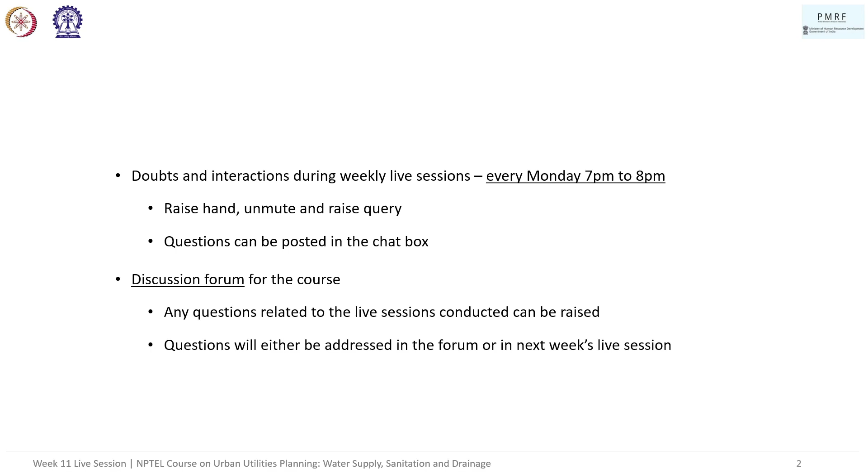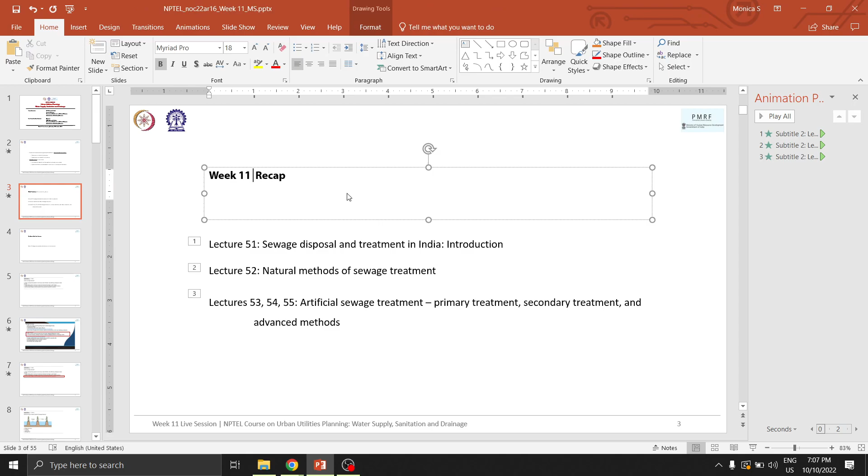So, week 11 recap. We basically had lecture 51 focusing on sewage disposal and treatment in India. There was an introduction given with a few case studies. Lecture 52 had natural methods of sewage treatment and what are the consequences when it is allowed, etc. The next three lectures focused on artificial sewage treatment, which involved primary treatment, secondary treatment, and some advanced methods were covered.

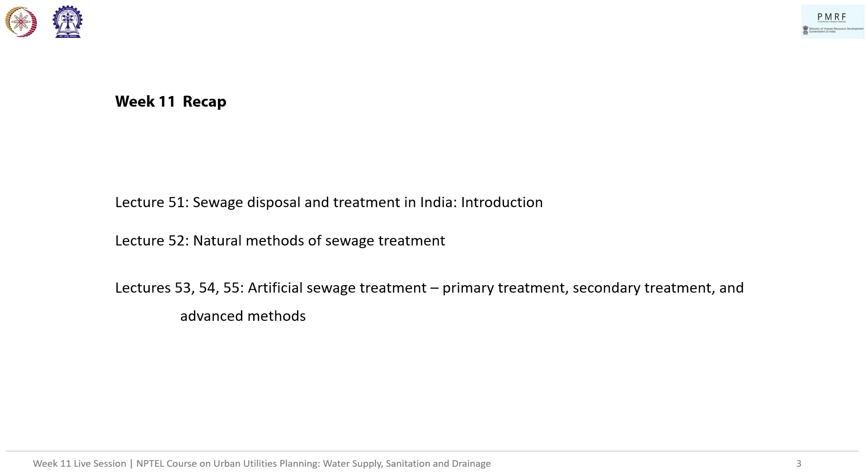Right. In this live session, we'll basically be looking at a few questions corresponding to week 11's assignment from the previous run of the course. So please note that there are quite a few minor errors throughout the session.

Also, since Ms. Supriya has queries in the current session, let's start with that. Right, so this was the originally planned one.

Ms. Supriya, you said that you have a query in question number 12, right? Yes. What is biological treatment of sewage, and what it is, with options also. I'll explain it, don't tell the answer. We'll come back to it because I told you I might have one question which is close to this, so we'll come back to this at that question.

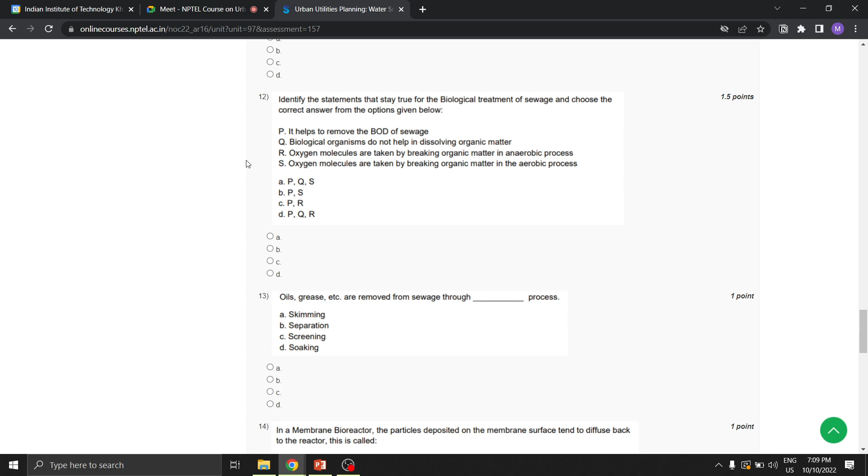By dilution is just one option, right? Like how you can address sewage. But if certain things happen, you're not allowed to go for treatment by dilution, right? You need to meet certain conditions, only then can you allow treatment by dilution. I'll give you one major option that doesn't meet the requirement.

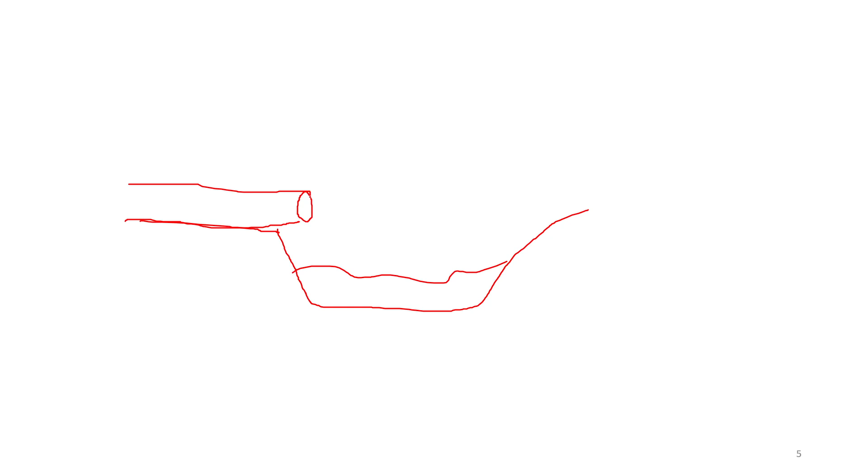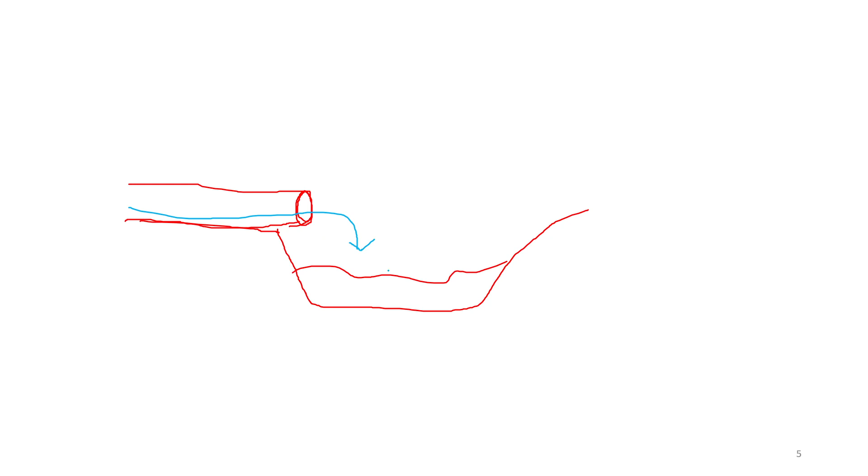For example, take D, backflow to sewer. So if there is backflow to sewer - if you remember, say there is a water body, right? And you have a sewer from the city, sort of draining sewage in. However, if the water level sometimes rises and there is going to be backflow into the sewer, then you actually cannot have dilution, right? Treatment by dilution.

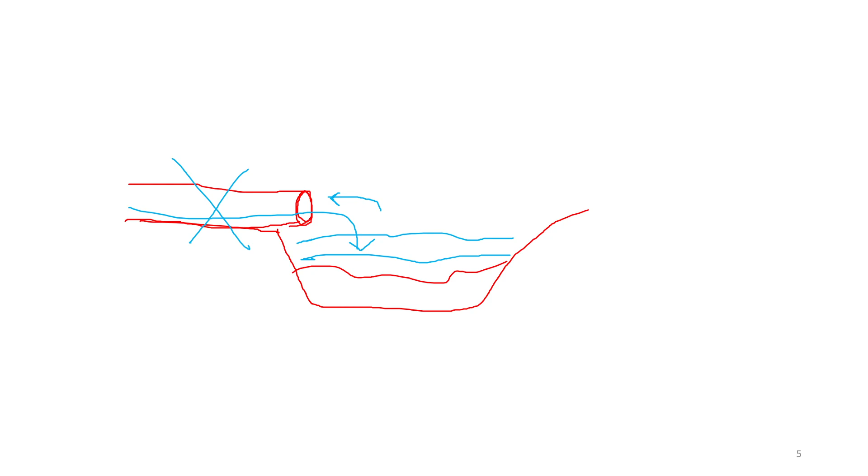Treatment by dilution is basically when you have a large water body and you just mix sewage into the water body, and it's so vast, or the movement of water is so high, that it will not affect the concentration of sewage in it, will not affect consumption, or will be sort of taken care of, right? Does that answer your issue, Supriya?

Yeah, backflow of sewer, that doesn't work, right? So what do you think the answer should be? What is the basic condition, of the four answers given, that will allow treatment by dilution?

Okay, unharmful to aquatic life. Yeah, it basically shouldn't be harmful to aquatic life. If you notice, if there is backflow, if there is sludge bank formation, you cannot allow it. Insufficient depth, you cannot allow it. And if it is unharmful to aquatic life, you can allow treatment by dilution. So that's how you are supposed to look at the answer. And backflow to sewer, again as I explained, you cannot allow it. Is that clear? Okay, so unharmful to aquatic life is the correct answer.

Yes, okay. Sludge bank formation, can you explain? So sludge bank formation is when there is too much sedimentation of sludge - again, it's when there is incoming sewage into the water body.

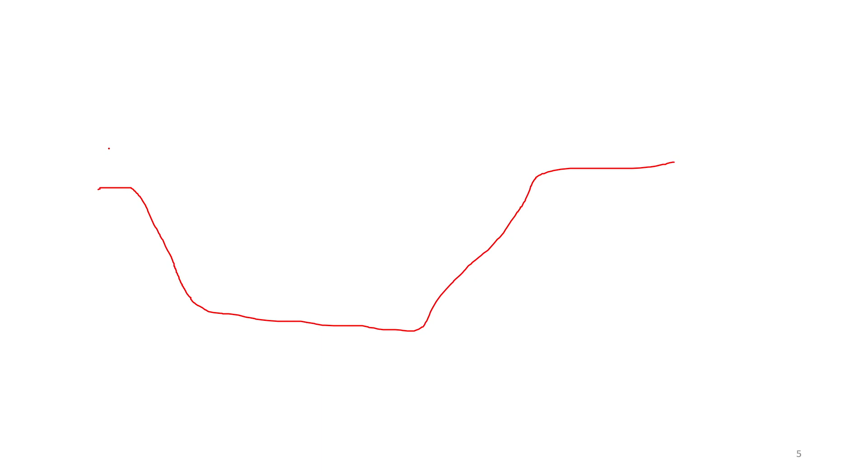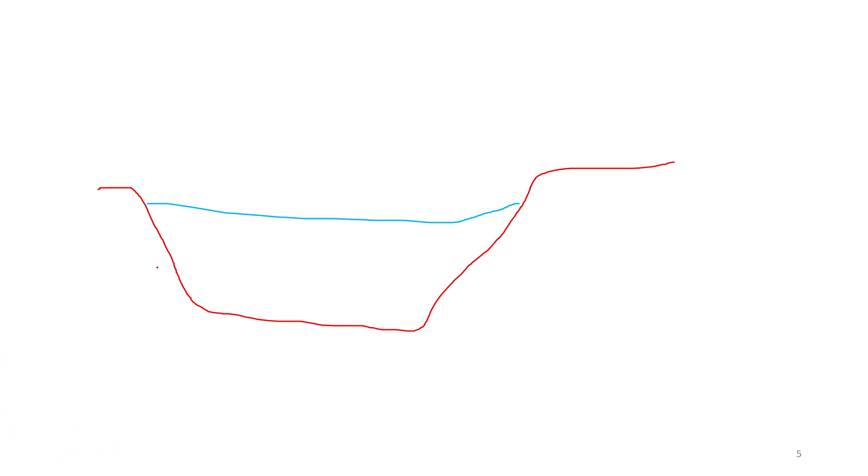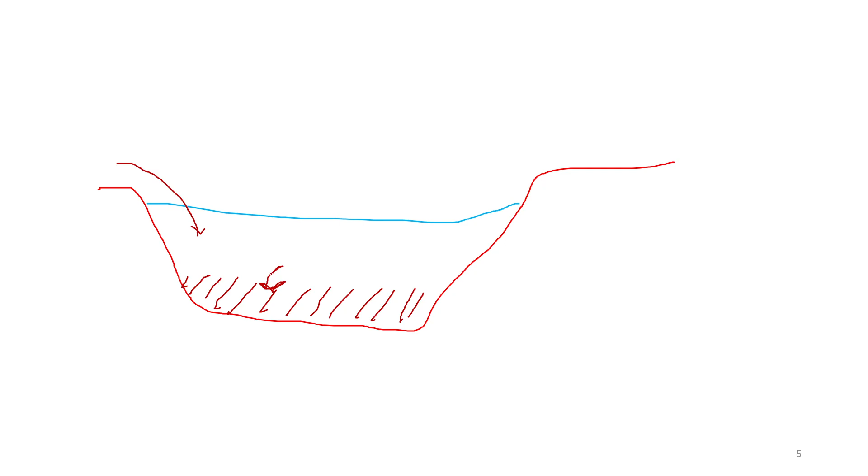So say this is the water body, and there is incoming sewage into it. If the water flow is very low, if the movement of water is very low, it will start forming sludge. Because of this formation, two things happen: one, the capacity of the water body reduces, but it can also lead to anaerobic processes, which means the water body will start stinking very soon. So that is why you cannot allow it.

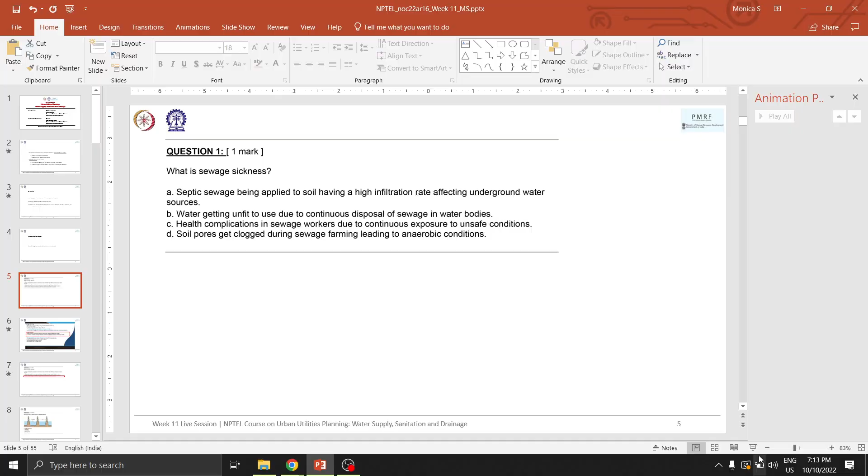So let's go to the questions from the previous assignment.

Question number one: what is sewage sickness? A. It is septic sewage being applied to soil having a high infiltration rate, affecting underground water sources. B. Water getting unfit to use due to continuous disposal of sewage in water bodies. C. Health complications in sewage workers due to continuous exposure to unsafe conditions. D. Soil pores get clogged during sewage farming, leading to anaerobic conditions.

Any answers? It's D. Soil pores get clogged during sewage farming, leading to anaerobic conditions. Anybody else?

That's the right answer. Most of these questions are going to be theoretical, so let's continue.

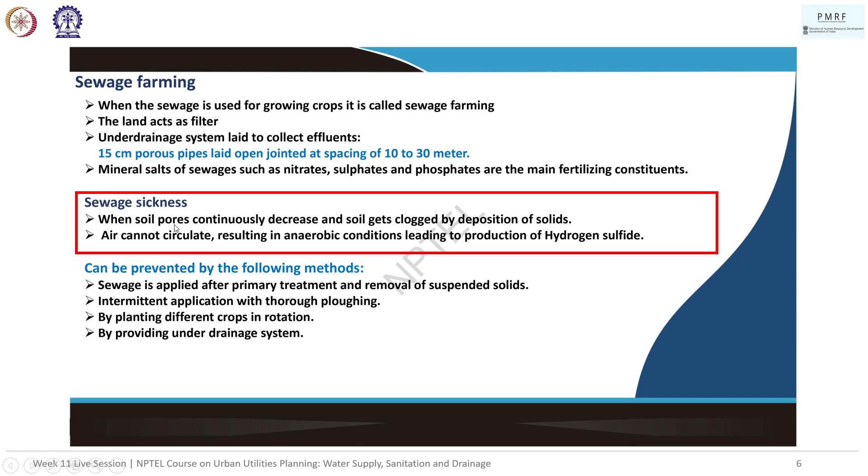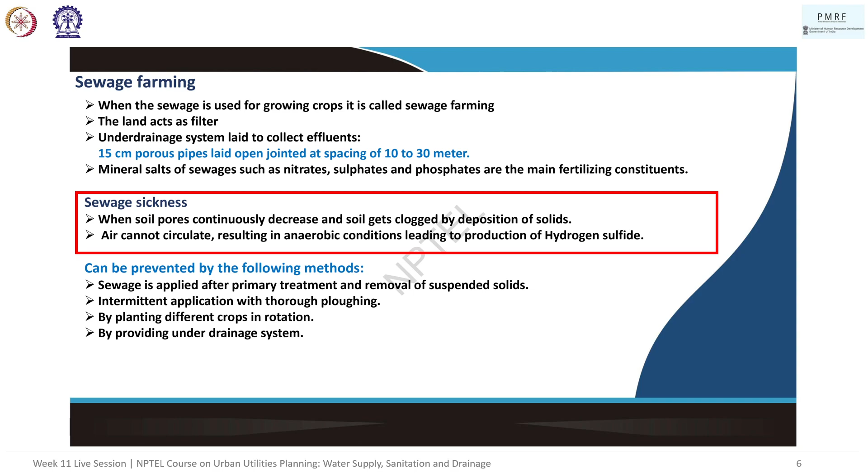So the answer is: when soil pores are continuously decreased and it gets clogged by the deposition of solids, air will stop circulating and anaerobic conditions prevail, and there will be a production of hydrogen sulfide. So the answer is D.

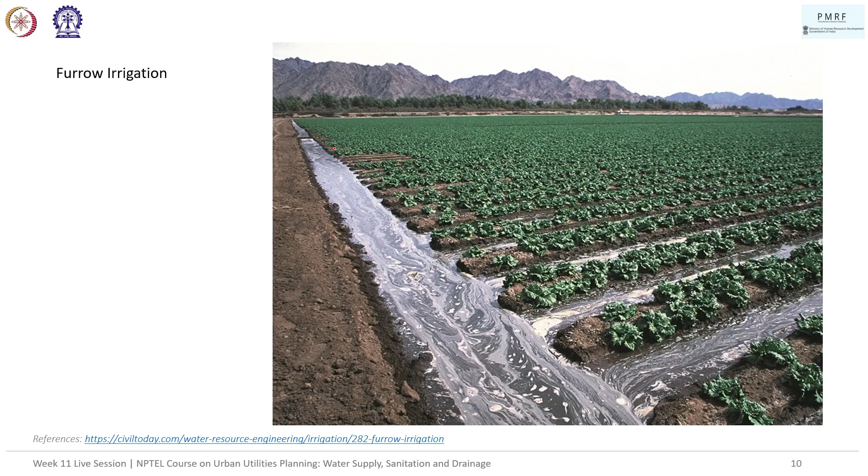If you notice from the slides, ridge and furrow is given. You can see the image right here. It is basically land plowed deep into 30 centimeter furrows, leveled into plots and subplots. They are enclosed by dikes forming ridges and furrows in the subplot. So essentially it looks like this. Please keep in mind that ridge and furrow irrigation is not a term specific to sewage treatment—it's actually a very common irrigation term. However, we can use this form of irrigation to do sewage farming.

So that's ridge and furrow. Flooding is basically when the crop is located in water, and you flood the entire crop. This is permissible in certain crops—for example, rice cultivation basically starts off like that.

Then lagooning is not actually a natural method of sewage treatment—it's a part of the sewage treatment process. Essentially you construct a huge reservoir, but it's an indirect method. Water is detained for a period and then taken out, and the sludge that builds up is used in farming. So that's how lagooning comes into the picture.

And managed turf is actually just another term for spray irrigation. Anybody familiar with sports will know the turf—it's managed and very properly maintained. The growth is not allowed to go beyond a certain level, so the height of the grass is very strictly maintained. That's a turf.

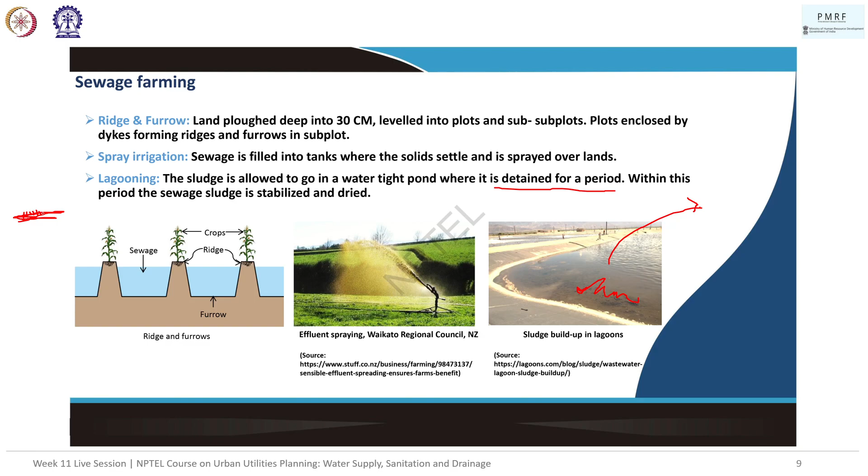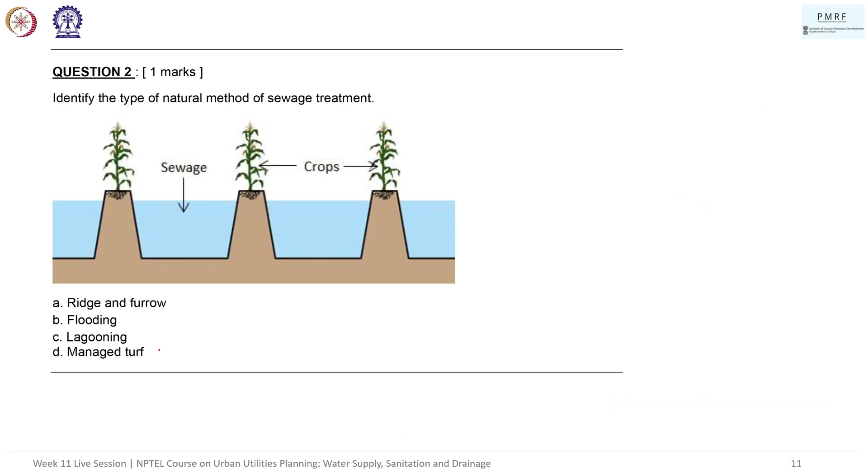So managed turf is not really directly applicable, but even in this context we can use sewage treatment for managed turf, though the managing part becomes difficult. Only the underground methods—if you remember from the slides, where you have underground pipes carrying sewage—can be used for managed turf. But correctly, the answer is A.

Moving on to the next question. The processes involved in the aerobic type of biological sewage treatment are: A. Hydrolysis, bioreduction, biosynthesis. B. Glycolysis, hydrolysis, bioreduction. C. Hydrolysis, biooxidation and biosynthesis. D. Glycolysis, hydrolysis and biooxidation.

Any responses? So right now we are particularly talking about the aerobic type of biological sewage treatment. In essence, there can be two types of biological sewage treatment: one is aerobic metabolism and the other is anaerobic metabolism. However, in the slide you can see three processes.

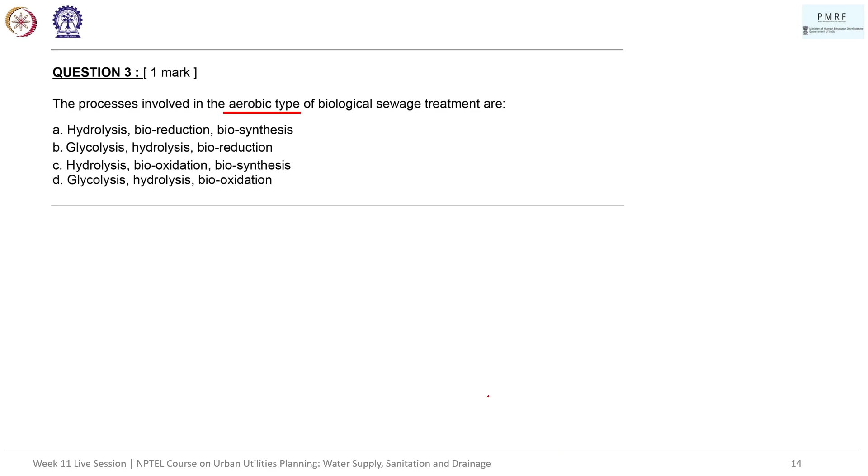So the answer is actually C: hydrolysis, biooxidation, and biosynthesis. These are the processes involved in the aerobic type of biological sewage treatment. Any queries regarding this? No, okay.

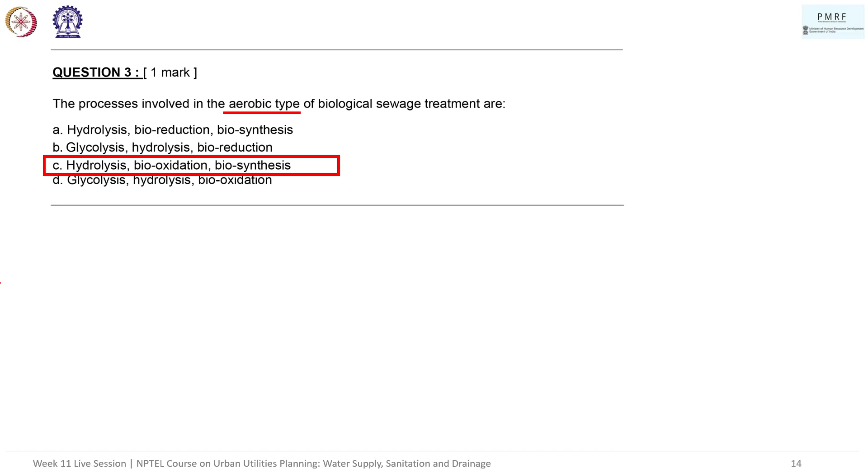So just take note of this correction, right? Moving on to the next question.

Which statements is or are incorrect about the biological treatment process? A. Biological sewage treatment involves aerobic or anaerobic microorganisms to decompose the organic and inorganic particles of sewage. B. Biological sewage treatment involves activated sludge process, sequencing batch reactor, and membrane bioreactor. C. Nitrogenous compounds are released during anaerobic process mostly. D. Bioreduction of soluble organic matter results in the release of hydrogen sulfide, methane, water, ammonia, and energy. And E. Methane production is achieved by aerobic process. Any responses?

Okay, let's look at each one of the statements. First, biological sewage treatment involves aerobic or anaerobic microorganisms. That part is correct because we have two mechanisms, aerobic and anaerobic. Some organisms might overlap, but fundamentally there's a set involved in aerobic processes and others that are anaerobic microorganisms. These are fine to decompose the organic and inorganic particles of sewage. So this is where the issue comes in. Both of these are actually only going to act on the organic particles of sewage. The inorganic particles cannot be processed by microorganisms. So biological organisms are allowed to consume the organic matter, but they cannot deal with inorganic particles of sewage, which means A is one of the incorrect answers. B, we'll consider later. Let's move on to C.

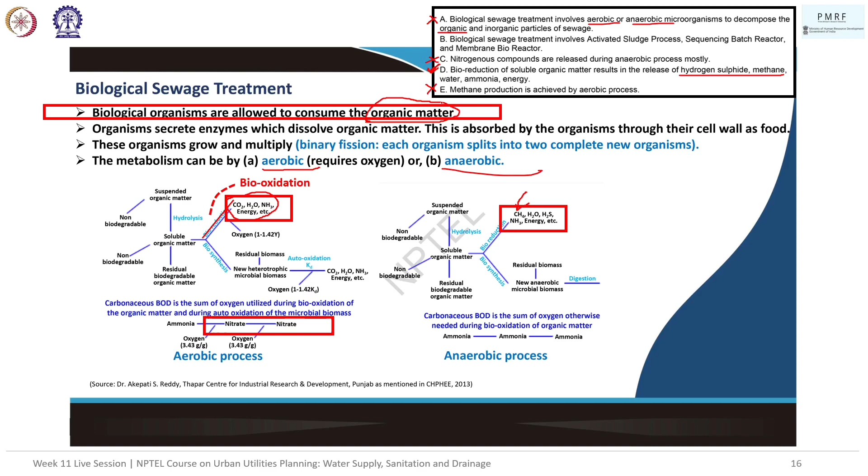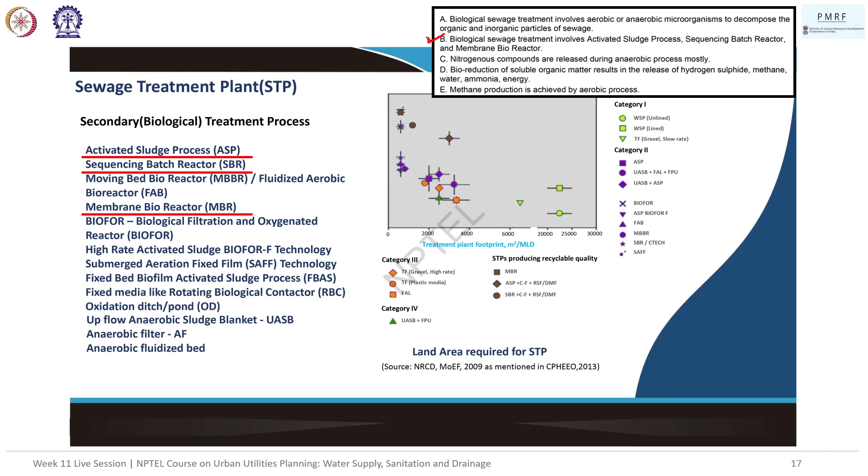Let's look at B. Biological sewage treatment involves activated sludge process - yes, if you look at it from the slides. Sequencing batch reactor, yes, it's part of the list, and membrane bioreactor. So this statement is also correct about biological sewage treatment. So the answer is actually A, C, and E. In A, inorganic particles is the problem. In C, it's actually produced mostly during aerobic processes. And E, methane production is achieved actually by anaerobic process. Any queries? No. All right, so these are particular things that you basically need to notice while reading through the statement. I mean, something as big as this statement, I would have also probably missed the organic and inorganic part. I'll be concentrating on the aerobic and anaerobic microorganisms part, but please be mindful of this.

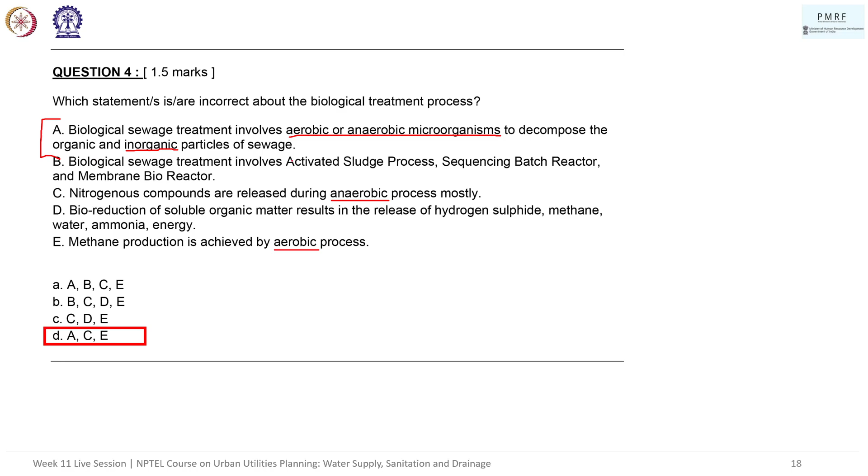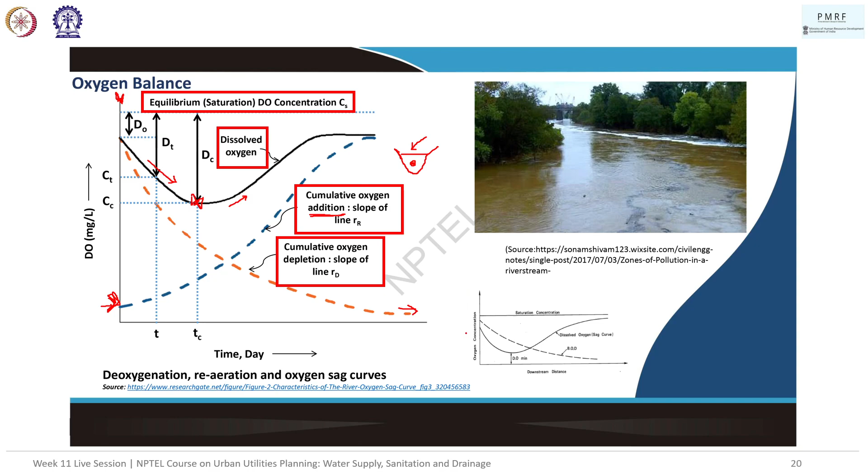BOD keeps decreasing because organic matter is either settling down or being processed by organisms. So the answer is actually D. A and B were right, but C is the reoxygenation curve. So over time, oxygen will keep increasing and BOD will keep decreasing.

Any queries? No, please go ahead. Okay, I hope that's clear and it will help you remember the curves as well. Right? Yeah, so next question.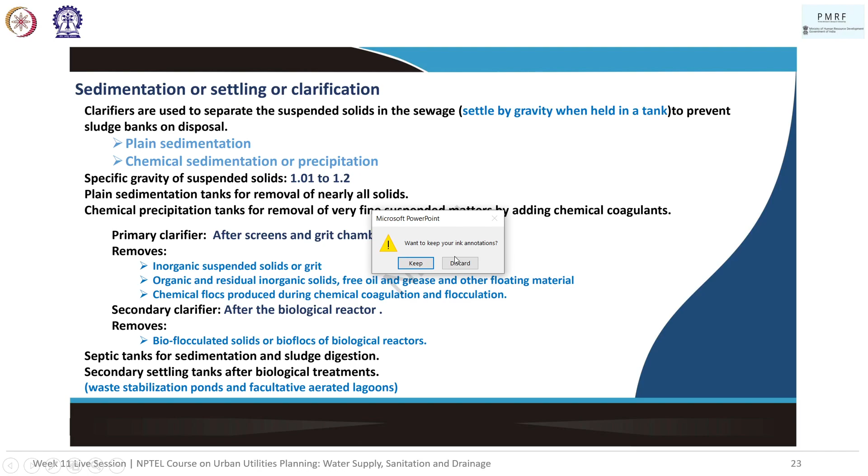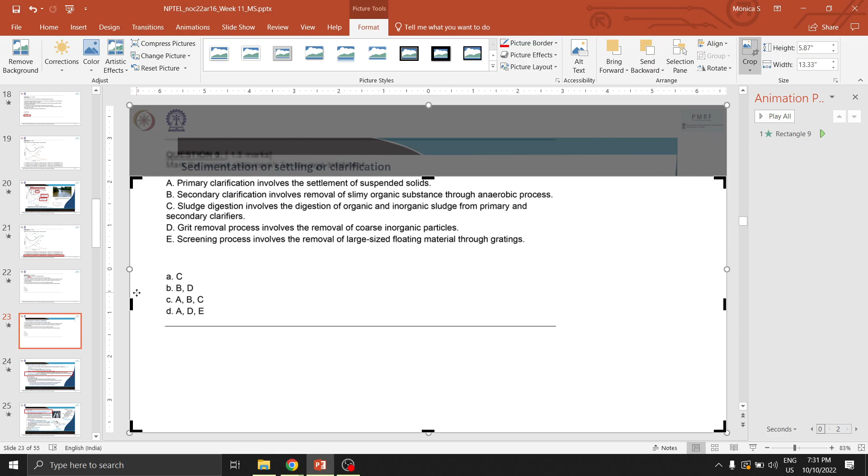Let's go ahead and look at the statements, right? So the first statement is about... okay, I didn't include it, let me just include the statements here for ready reference, otherwise it's difficult.

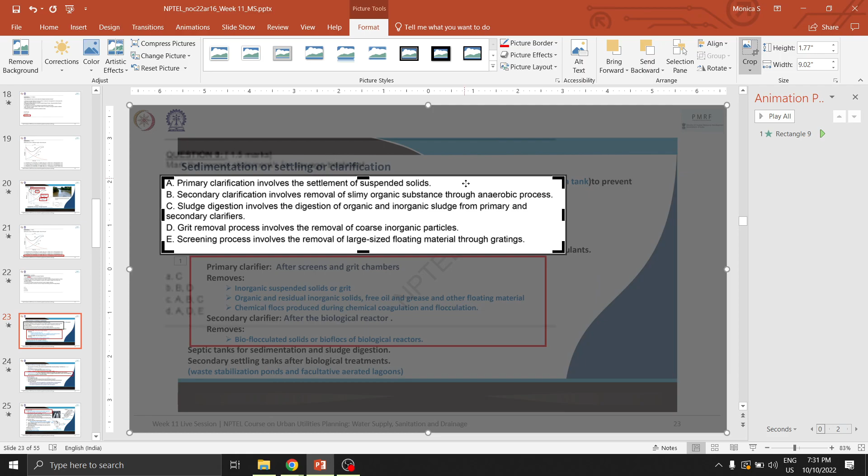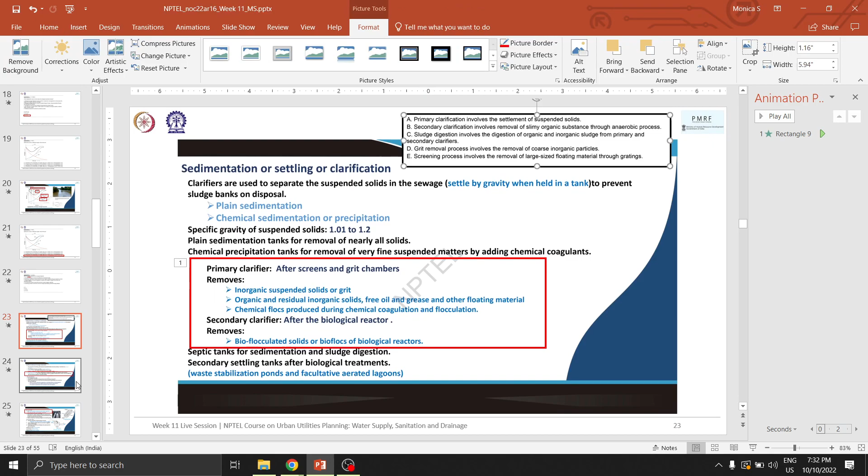So, first statement: regarding primary clarification, it involves the settlement of suspended solids. Yes, it does involve the settlement of suspended solids. It actually happens right after the screens and grit chambers phase.

Then the secondary clarification statement says it involves removal of slimy organic substances through an anaerobic process. The issue with this is, yes, secondary clarification does involve settlement and separation of settled slime, that part is fine. However, it's after aeration, it's not an anaerobic process. So this sentence is actually wrong.

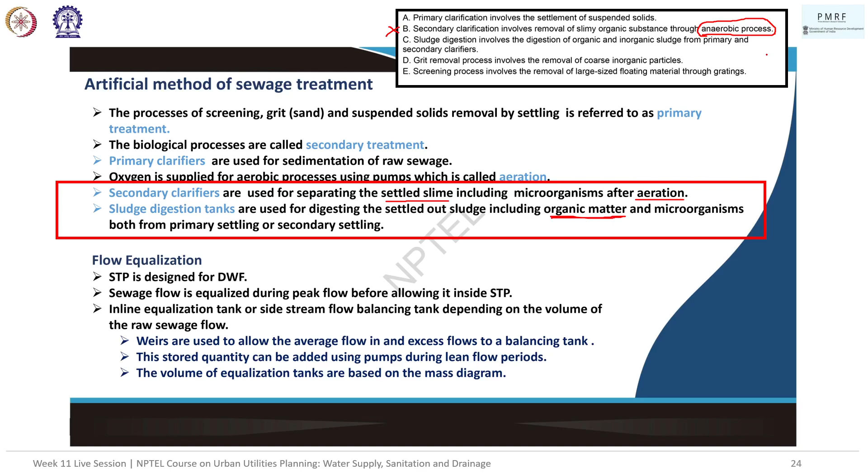The third statement, about sludge digestion: sludge digestion involves the digestion of organic and inorganic sludge from primary and secondary clarifiers. Again, sludge digestion actually involves only organic matter. So yes, it does involve sludge from both primary and secondary clarifiers, that part is fine, but the inorganic sludge part is wrong. So this statement is incorrect.

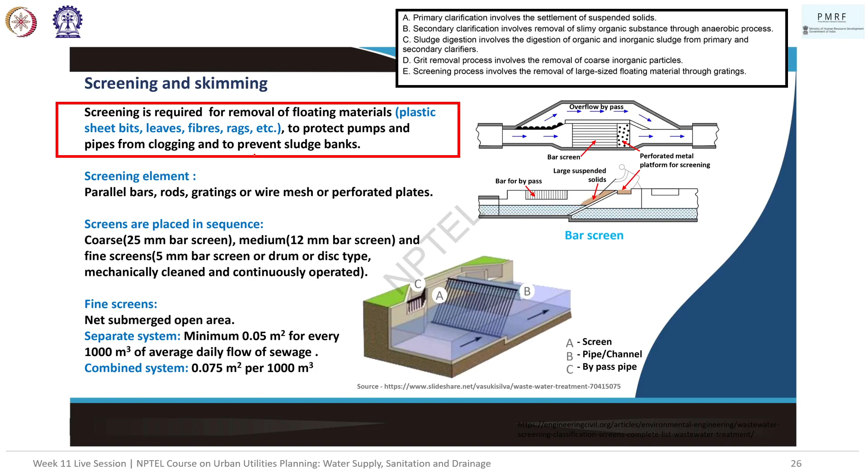The grit removal process involves the removal of coarse inorganic particles. Yes, these are all coarse particles like sand, ash, clinkers, eggshells, bone chips, such inorganic materials. So the coarse part is important, and the inorganic particles part is also important. And screening process involves removal of large-sized floating material through gratings. This is also correct.

So the answer is actually A, D, and E. In B, the issue is the anaerobic process part, it actually involves aeration, like in secondary clarification we have aerators which muddle the water and are used in secondary clarification. And for sludge digestion, the issue is with inorganic sludge, it only has organic sludge, so that part is wrong. Therefore the answer is A, D, and E.

Any queries regarding this? It's just a matter of option B, can you please tell me again? Option which one? B, why is B wrong?

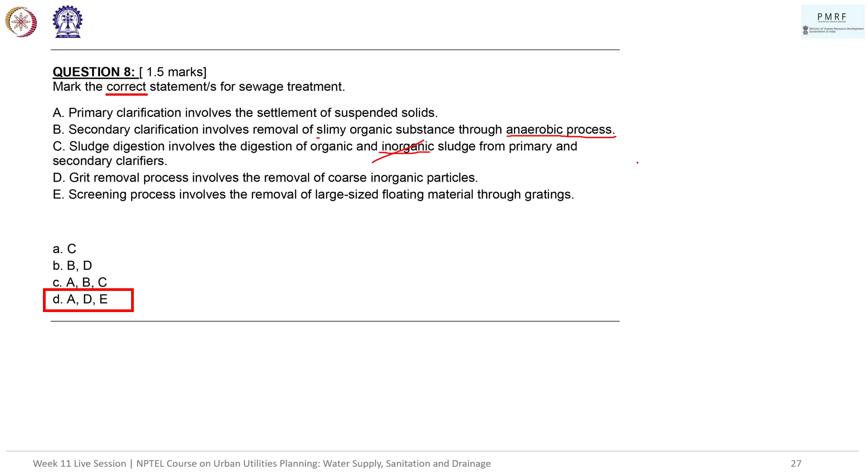If you notice, the slide also mentions how secondary clarifiers are used for separating the settled slime, including microorganisms, after aeration. So it's actually an aerobic process, not anaerobic. This statement says it's an anaerobic process, that's where the issue is, but otherwise the statement is correct, it involves the removal of slimy organic substances.

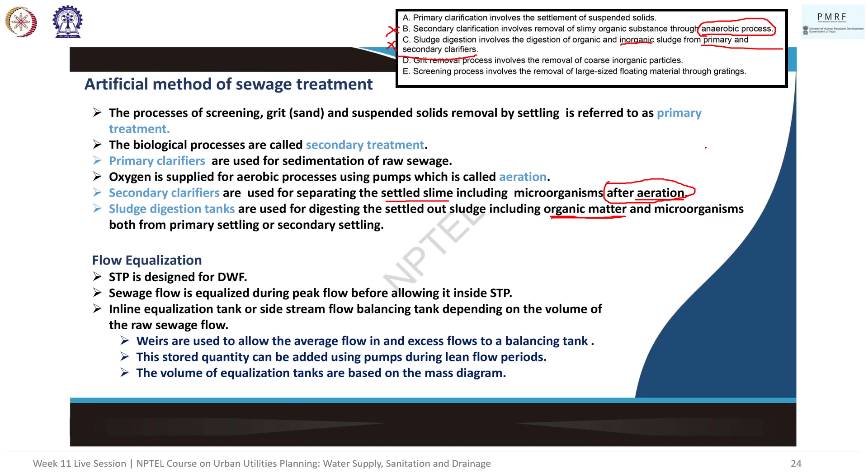Okay, moving on to the next question. During sewage treatment, grit is removed from sewage by the process of A: Differential sedimentation, B: Precipitation, C: Stabilization, and D: Flocculation. Any answers?

A or C, I'm not sure. Okay, okay. Any other responses?

Okay, so the answer is in fact A, right? It's actually mentioned in the slide also. Grit removal involves the separation of inorganic materials from organic solids by differential sedimentation. So the principle is basically that there is a difference in the rate of sedimentation when it comes to organic matter and inorganic matter, right?

Inorganic materials, especially the big chunks - what happens is, like when we are sieving something, if you notice, the larger particles sort of settle to one side, and the smaller particles settle to another. That's how we do even everyday processes, such as when you take rice and there are stones in it, to remove them we sieve them. This is something similar. So there is a difference in which part of the tank the different materials are going to settle down in. Sedimentation will happen.

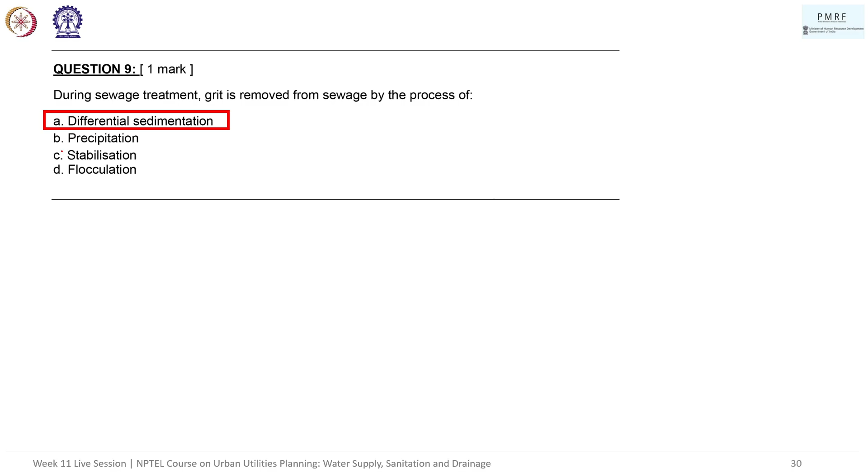In fact, stabilization is probably something you'll see in plain sedimentation tanks, not at the grit removal stage. If you notice, grit removal actually uses movement mostly.

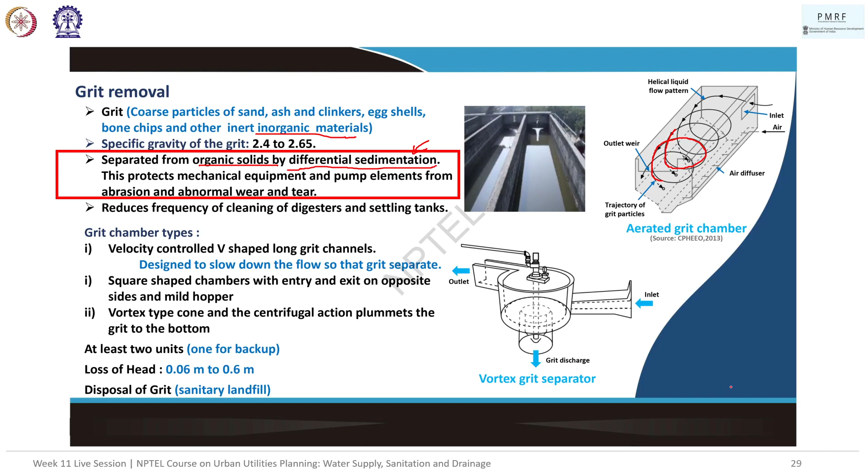Okay, so let's move on to the next question. During sewage treatment, the coarse suspended solid particles that cannot be removed by screening, skimming, or grit removal process are removed by: A. Secondary clarification, B. Chemical sedimentation, C. Plain sedimentation, or D. Activated sludge process. Any responses?

It's secondary or activated - not plain, not chemical. So maybe A or D. Secondary clarification, it is. Okay.

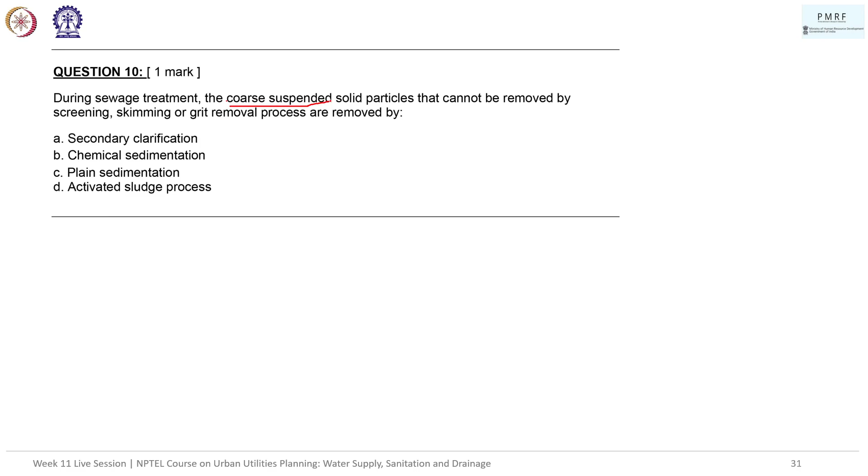If you remember from the previous question, secondary clarification actually involves removal of slimy organic substances, right? However, currently we are talking about coarse suspended particles, like solid particles. However, unfortunately they did not get removed - say the screen size is too big, somehow they got through it. You understand screens, right? It's basically a mesh or a slotted thing. So they somehow got through this screen. So what is the first thing that we'll do to remove these?

So secondary clarification will be much later. And activated sludge process is not it - actually the answer is plain sedimentation, right? So you might think chemical sedimentation may also remove suspended solid particles. However, immediately after this, there is a sequence. During sewage treatment, right after those that cannot be removed by screening, skimming, or grit removal will be removed by plain sedimentation. Those that cannot be removed by plain sedimentation will be removed by chemical sedimentation. And then we'll probably go for secondary clarification.

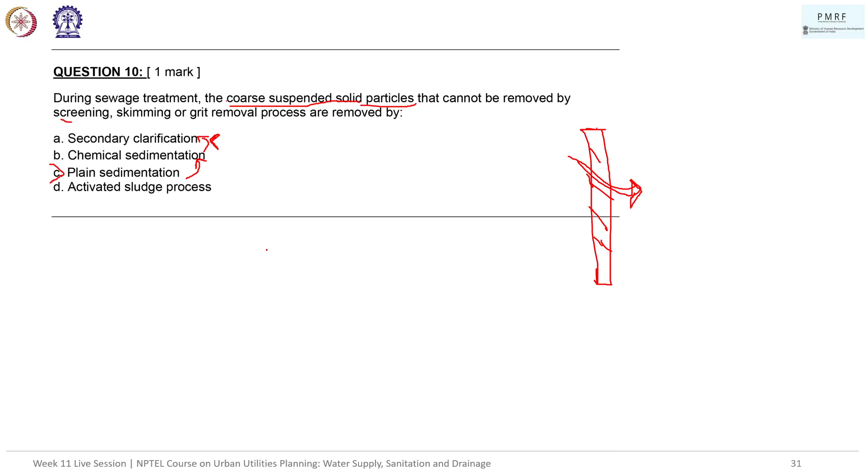And activated sludge process is actually a type of sewage treatment, so it's a sequence - a particular process, a sequence of steps that are involved. It might also involve multiple stages, so that's not really a relevant answer. So you can see it here - plain sedimentation is the answer.

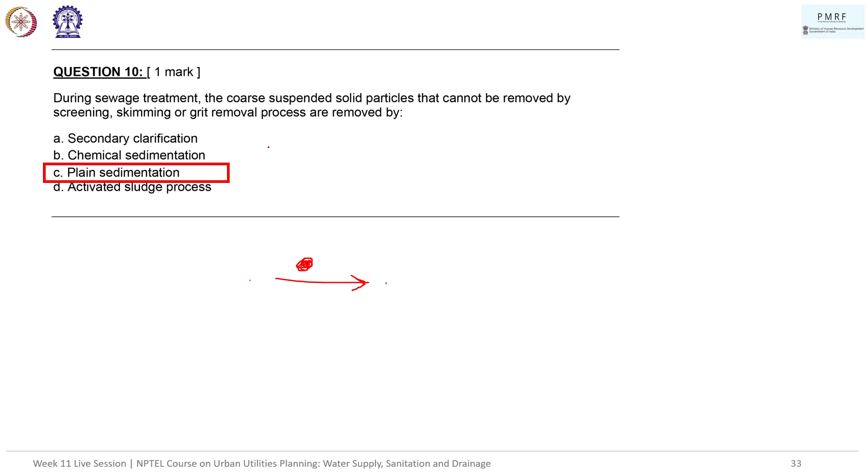Moving on to the next question. The dosage of coagulant required for the chemical sedimentation process depends on: A. pH of sewage, B. BOD of sewage, C. nature of coagulant, D. flocculation time, or E. size of the tank. Any answers?

C, D, E, C option. Okay, C, D. Okay.

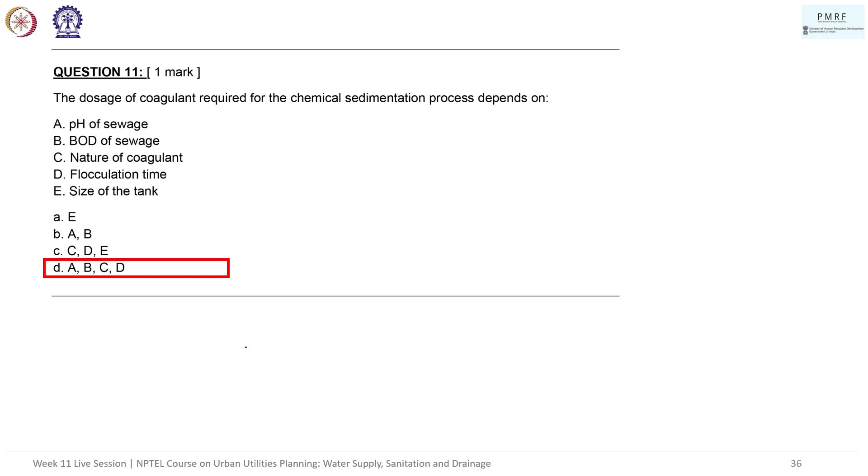Any queries regarding this? Unfortunately, BOD is not mentioned, but please take that into consideration as well. So moving on to the next question.

Self purification of water bodies involves: A. Sedimentation, B. Aeration, C. Reduction, and D. Decomposition.

Any answers? A, C, D - not aeration, okay. No, only A - matlab, not aeration. B option is wrong, A, C, D is correct. Okay, option C, okay.

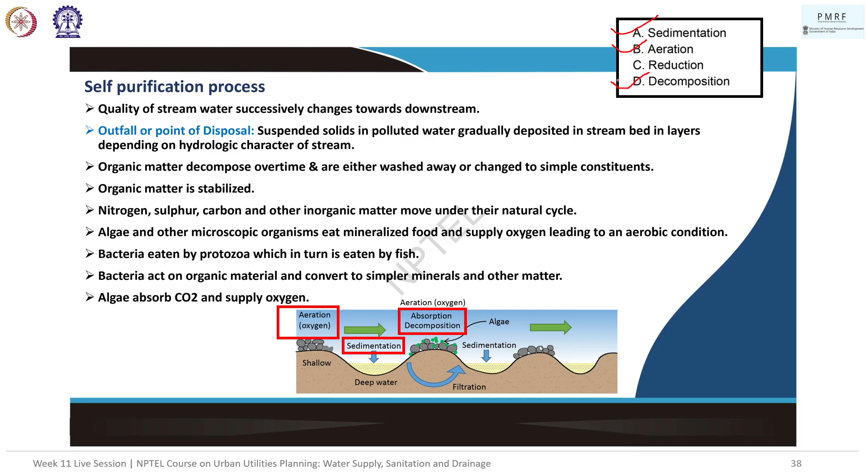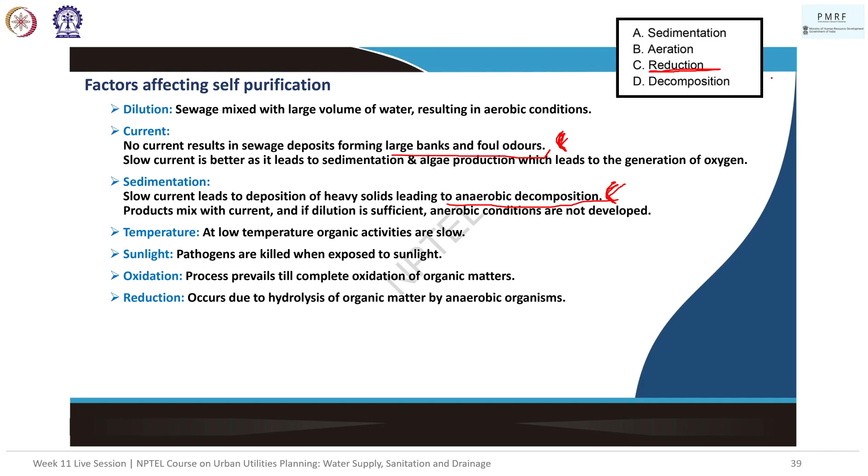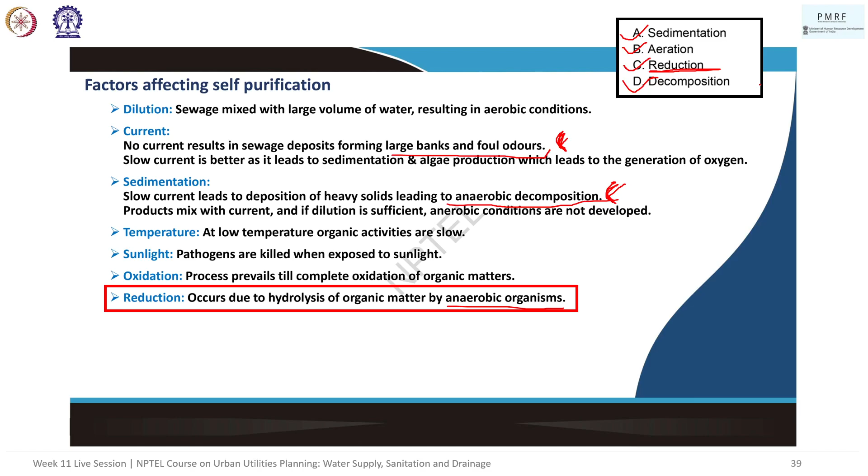Why? Ideally, in the correct type of self purification process, if you look at this part: no current results in sewage deposits forming large banks and foul odours - this is the anaerobic part. Slow current leads to deposition of heavy solids, leading to anaerobic decomposition. These points pertain to reduction. Reduction happens only when there is an anaerobic reaction, however, if you notice it here, it's given by anaerobic microorganisms. Self purification in its good form will only involve sedimentation, aeration, decomposition, and probably absorption. But it is actually possible that the self purification process is also having reduction - it might be harmful, but that is also called self purification process. So the answer is actually A, B, C, and D. Normally all four are possible, but for a good process, where the environment is not affected, A, B, and D are the only things that should be there. In fact, D shouldn't lead to reduction.

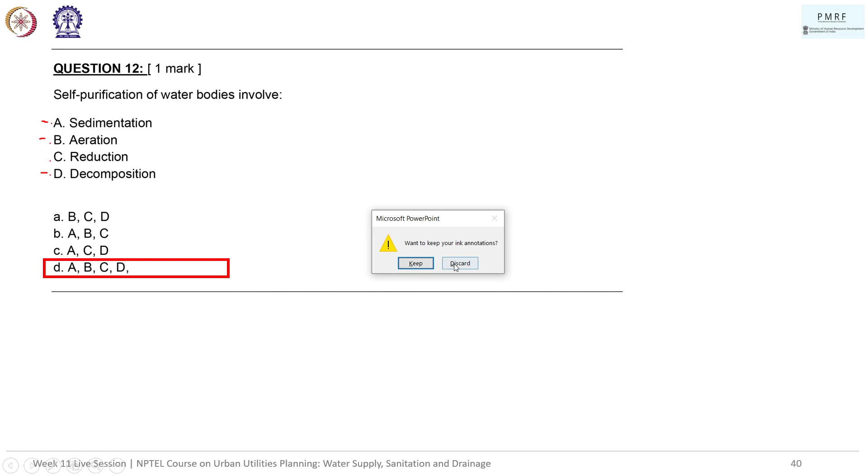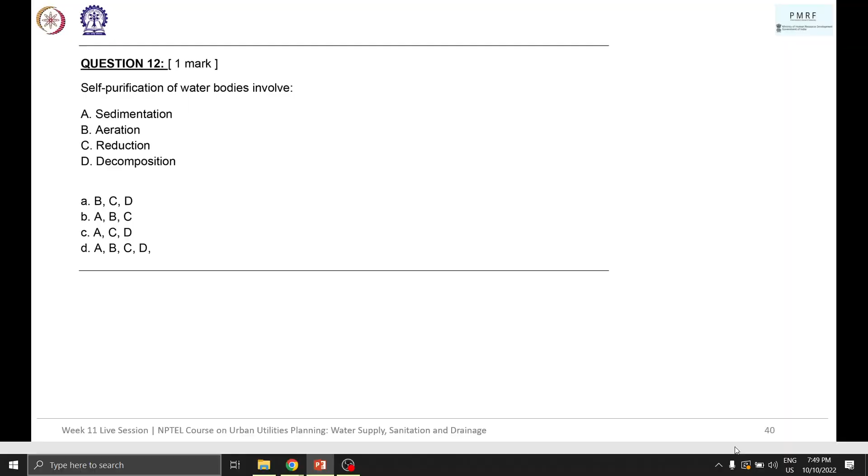I think this sort of brings us back to question number 12, if I'm not wrong. No, that was regarding biological treatment. Okay, so my bad, we'll come back to that later.

So the answer is actually D. Any queries in this? No. Move on to the next question. Match the following and mark the option for the correct match: which is the trickling filter, which is the chemical sedimentation tank, and which is the plain sedimentation tank? Any answers?

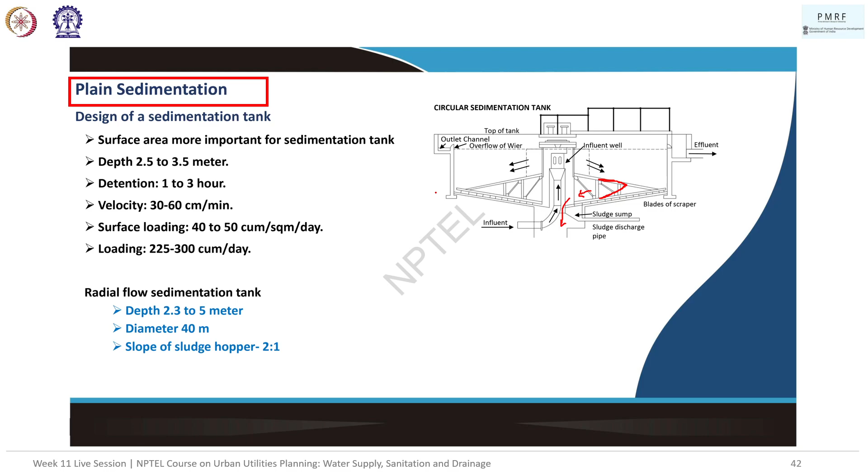It will have a scraper to remove the sludge and put it back into the sludge sump. This will be there, but usually it doesn't have any aeration mechanism. In a chemical sedimentation tank, the most important thing to look for is the chemical feed. Otherwise it's a normal sedimentation tank. This mechanism enables the mixing of chemicals, and this is the scraper again, for scraping sludge.

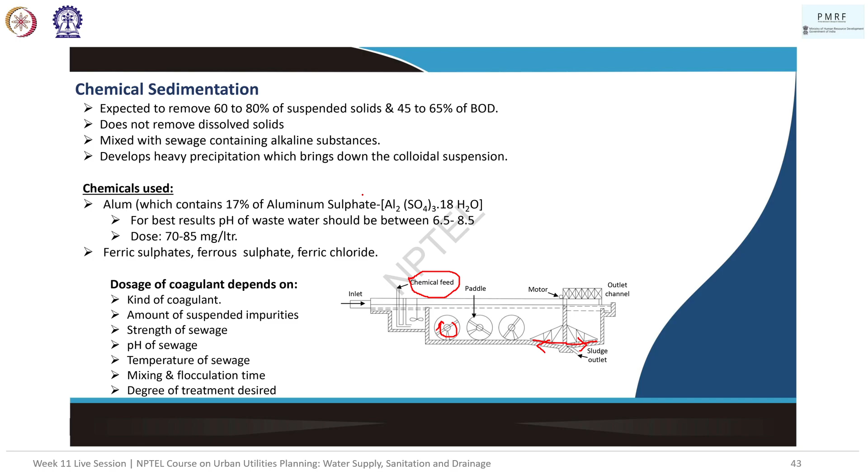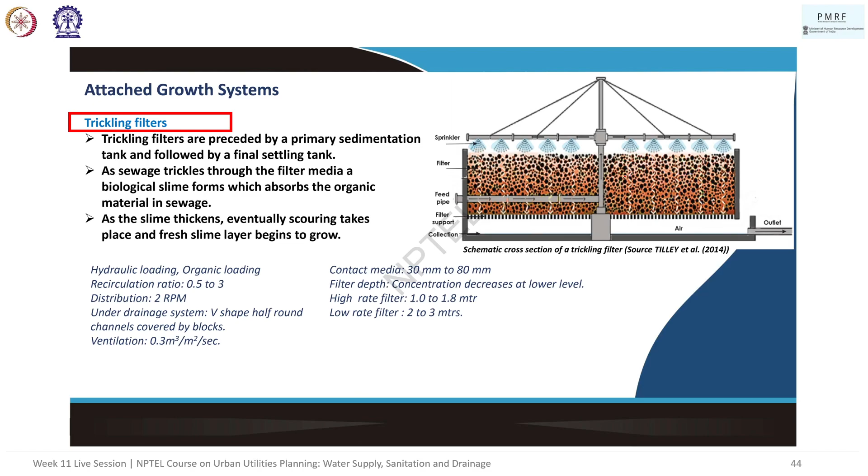Trickling filters are a type of attached growth system. An attached growth system is when you have a surface on which you have bacterial or some microorganic culture, which helps in the filtration. So yes, your answer is right. This is the trickling filter, chemical sedimentation tank, and plain sedimentation tank.

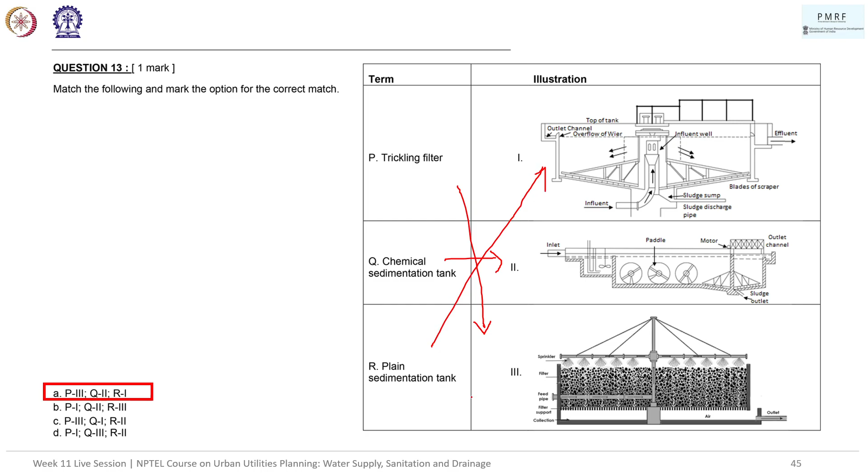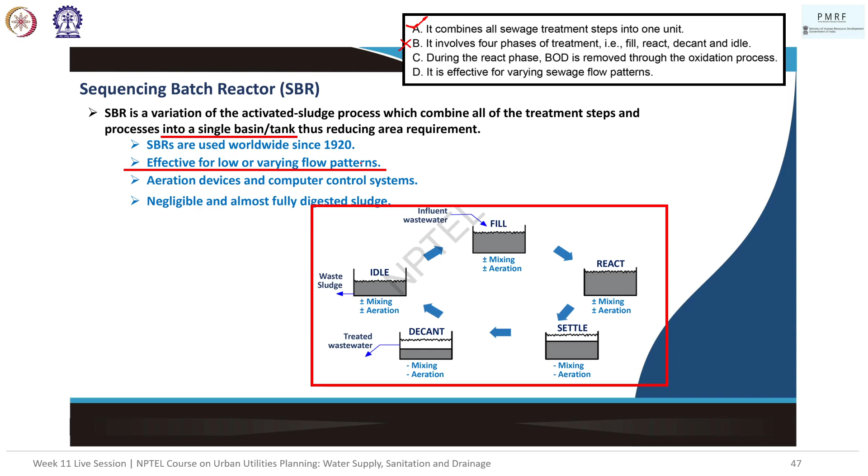C says during the react phase, BOD is removed through the oxidation process. Before that, D, it is effective for varying sewage flow patterns, which is true, especially for low or varying flow patterns. And C, during the react phase, BOD is removed through oxidation process, yes, which is also true. Most of the BOD removal occurs in the react phase through an oxidation process, because aeration is involved there.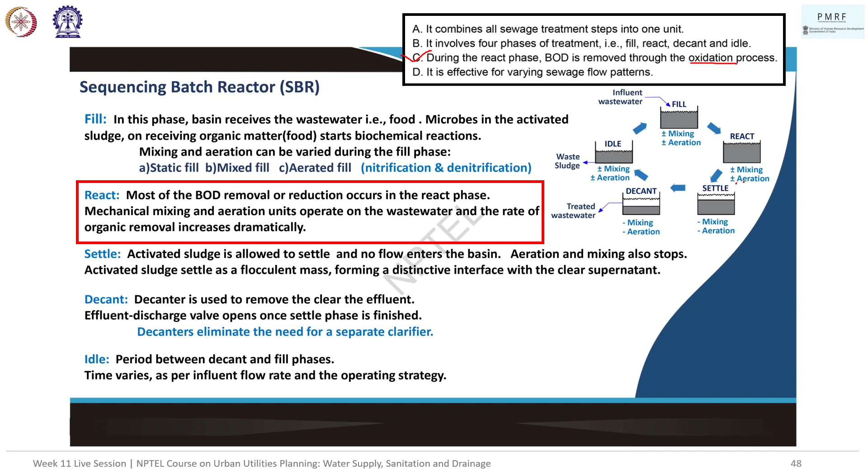So actually only B is the answer; none of the other options are incorrect. In the original answer key, they mentioned that B and C are incorrect, but if I'm not wrong, only B is the answer. I'll run this by the NPTEL team as well, just in case I'm missing something, but only B is the answer here. Please take note of this.

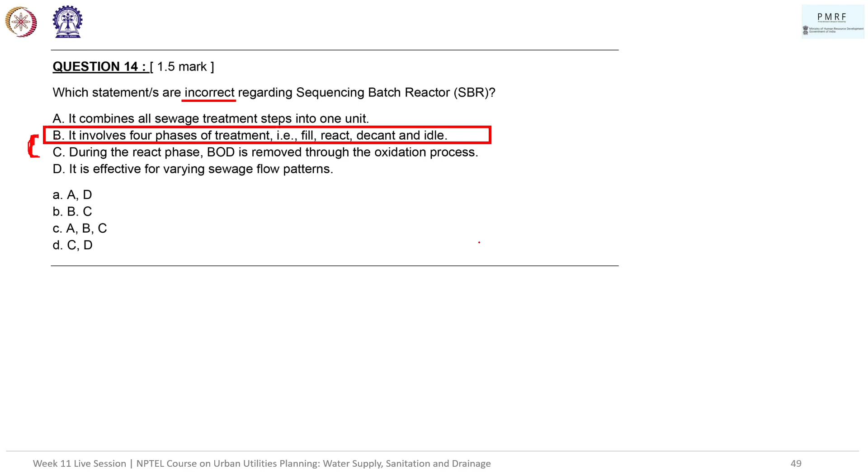Any queries? I hope not. Okay, let's go on to the next one. Please go ahead. Thank you, let's go on.

I think this is probably the last question for the evening. The question is: attached growth systems for biological treatment of sewage include A. Aerated lagoons, B. Moving bed biofilm reactors, C. Stabilization ponds, and D. Contact beds. Any answers?

Stabilization ponds.

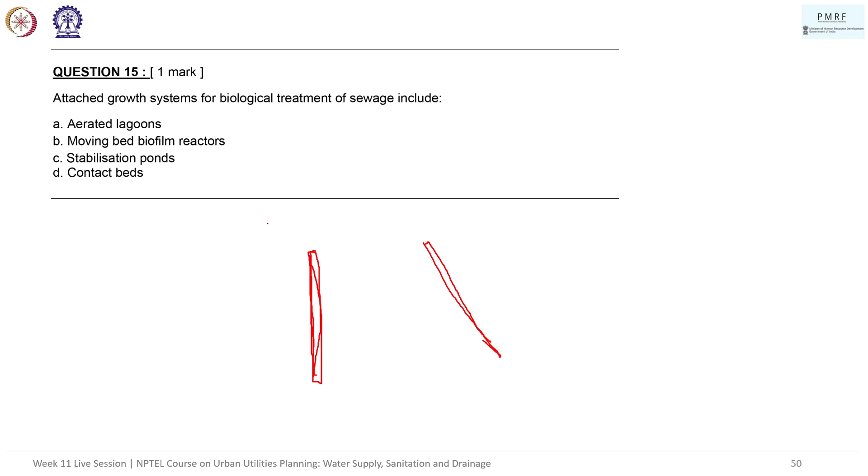Attached growth systems for biological treatment, like trickling filters, involve a surface, usually inclined for better logistics, with some kind of microorganisms or even algae growing on it. These aid the process of organic matter removal, and some physical filtration of suspended or soluble particles also happens. The sewage passes through these surfaces and organic content is reduced because the sewage interacts with the culture and helps process the organic matter. That's an attached growth system. In the case of stabilization ponds, we don't have such a surface with attached growth.

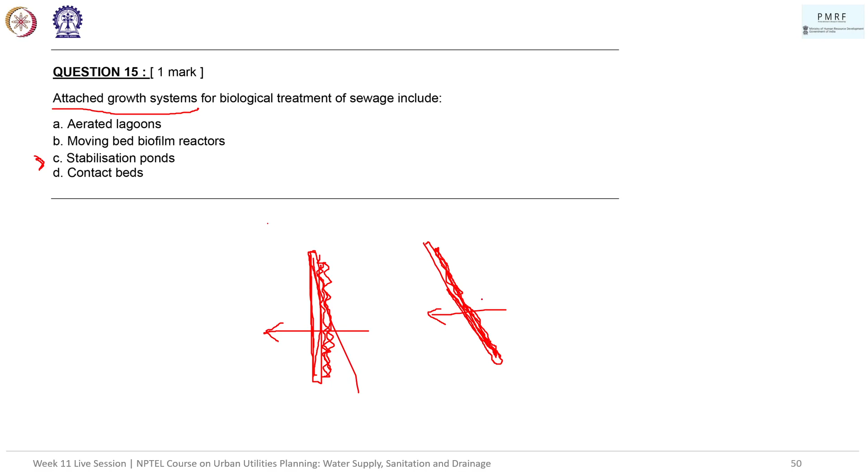Let's see what the answer is. If you look at the slide, it talks about how the main treatment takes place at the surface of the filtering media, where a bacterial film is formed. According to the key from last year's assignment solution, the answer is contact beds. These are filtering media beds of 2 to 2.5 centimeter size, made of broken stone and brick ballast. So the answer should technically be D.

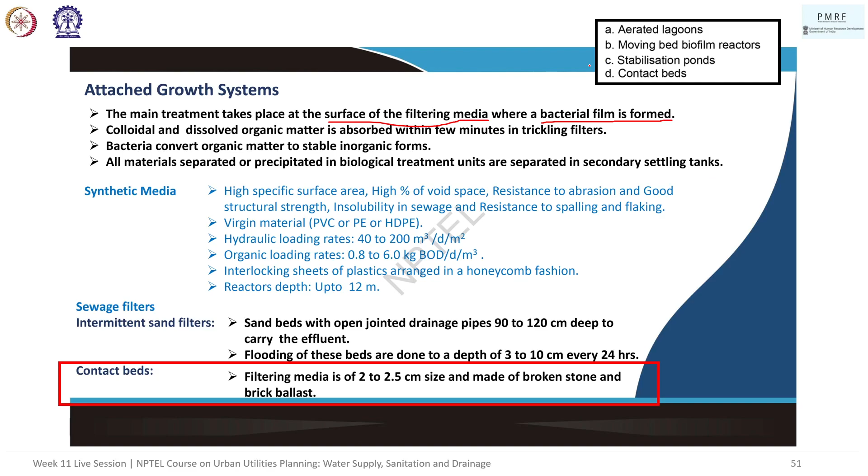Moving bed biofilm reactors (MBBR) are actually also advanced attached growth systems. They involve some kind of microorganism culture that helps in treatment of sewage. So the answer actually has two options that are applicable. According to the key, they've given the answer as contact beds, so I'll ask them to correct the options. They probably didn't realize they've given MBBR also, but MBBR is also an attached growth system, right? So what are the other two options?

If you notice, aerated lagoons are mentioned here. They are part of the activated sludge process where sewage containing organic matter is aerated in an aeration basin, in which microorganisms metabolize the organic matter, and a portion of the sludge formed is recirculated to facilitate bacterial growth. So there is no surface on which the microorganisms are sitting; they're actually within the water itself. Whenever treatment is done, they take a small part of the sludge and reinsert it into the next batch of water, so it's recirculated to keep the bacterial growth stable. If you remove the sludge, you might end up removing all the bacterial content as well. That's where aerated lagoons come in.

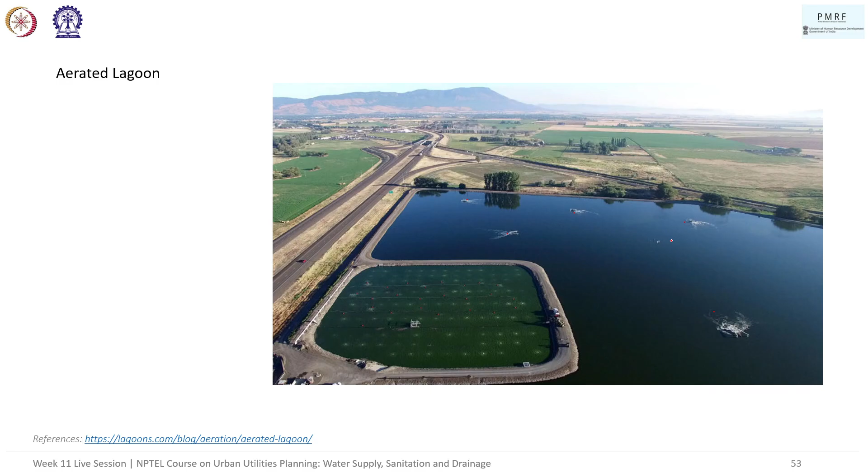This is a typical aerated lagoon. If you see, you actually have aeration happening here—it basically introduces disturbance in the water. There are fans of sort that expose the water body or the pond to aeration.

When it comes to stabilization ponds, you can look at it here. These are artificial open flow-through earthen basins where the organic matter of sewage is stabilized, meaning the movement is controlled. The detention period ranges from a few to several days. So these can also be used in biological or secondary treatment. But essentially, from the basin itself, the water effluent is taken care of, sort of like a natural process, but in an artificial basin.

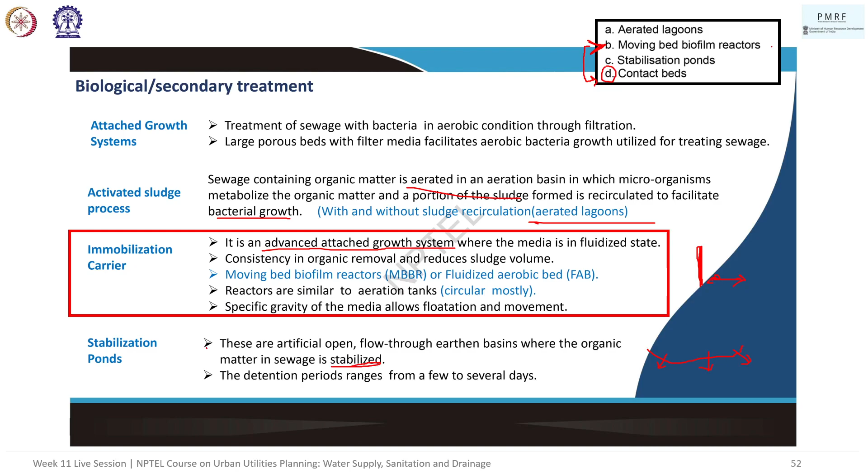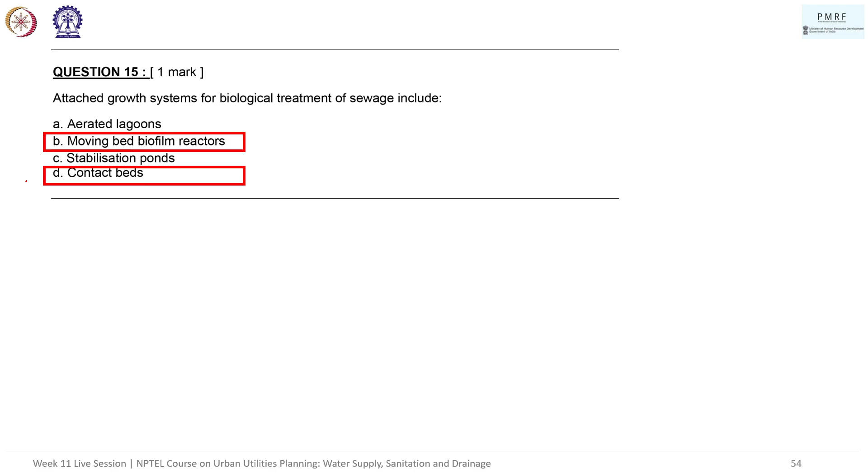So the answer is actually D and B. Again, please take this into consideration—the previous key actually doesn't mention this part. Alright, so that's all for today.

Now let's go back to the question that you had a doubt in, Ms. Supriya. Identify the statements that stay true for the biological treatment of sewage and choose the correct answer from the options given below. So this is talking about biological treatment of sewage.

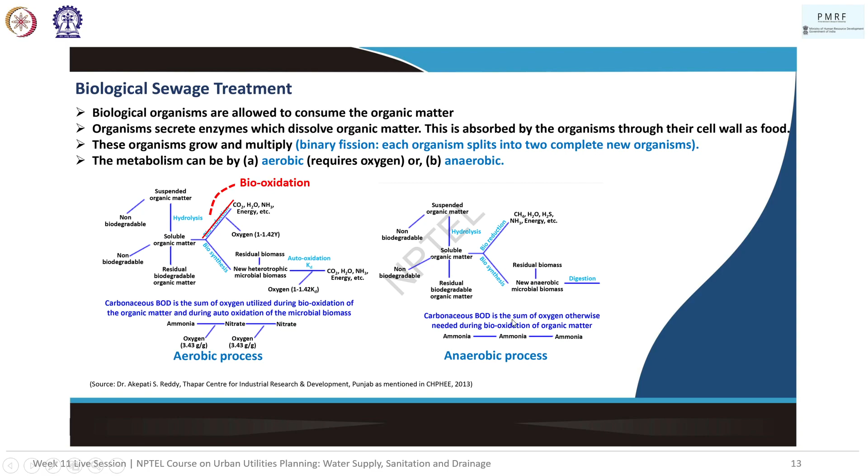It's called oxidation, right? If you notice here, the supply of oxygen is actually from outside. But in the anaerobic process, the supply of oxygen is taken by breaking down organic matter—the anaerobic organisms take the oxygen from the organic matter itself. So maybe that's what they're trying to talk about: oxygen molecules are taken by breaking organic matter in the aerobic process, and probably that's the difference here.

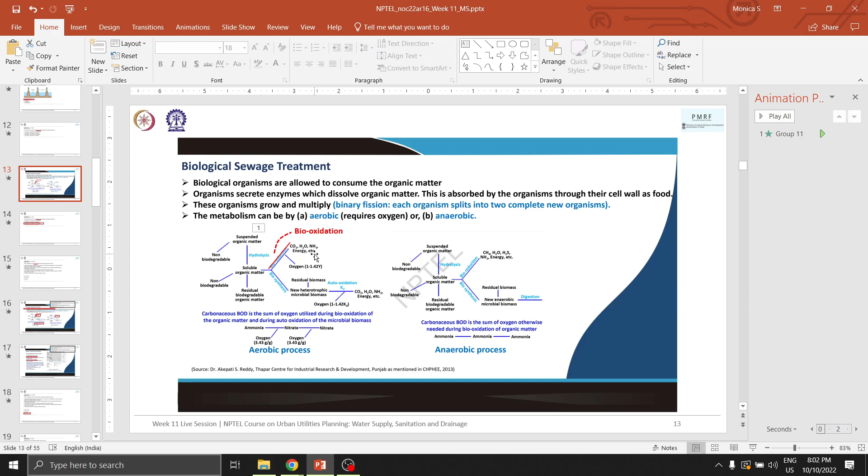So R is incorrect—no, the statement that oxygen molecules are taken by breaking organic matter in the aerobic process might be incorrect. There is a bit of ambiguity, but breaking organic matter is how oxygen molecules are attained in the anaerobic process. You don't have any other presence of oxygen there. So S might be wrong too. Because oxygen is already present for aerobic, they might not take the oxygen, which is why you can actually see the production of CO2 and H2O—so much oxygen is actually being released also. If they required it for breaking down, they wouldn't be releasing it. So that oxygen comes from the organic matter itself, making the statement correct. Is that better?

Yeah. So are there any other general queries or anything? No, no, no. Thank you. Anybody else? Mr. Ashwin, Ms. Devasena.